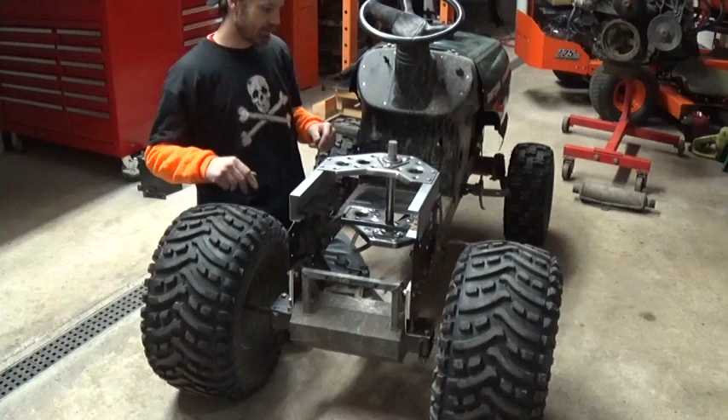This Jackshaft install though will actually have like 3 sections to it. The last video we wrapped up basically section 1, which is the Jackshaft itself. It is installed, she spins, she twirls, she does what she needs to do. I'm now going to move to section 2, which is a transaxle.

I want to get the transaxle input shaft extended up. I want to have it mounted at the same height as this top plate on the Jackshaft part. Once that's done, part 3 will be connecting A to B with sprockets and chain. So let's get started. It's going to be just like this piece over here, different shape, different bearing, but same principles and all that fun hoo-ha stuff.

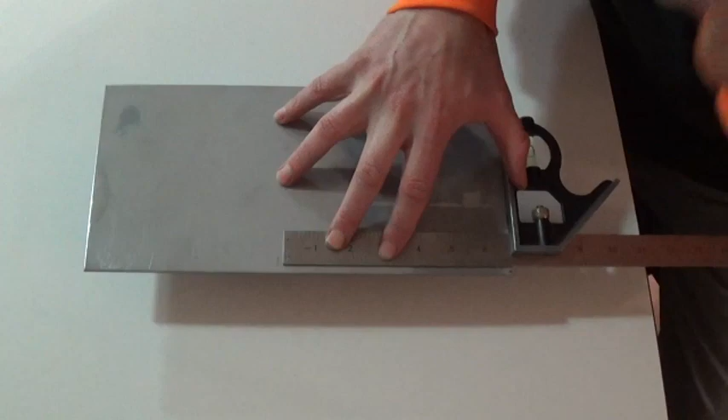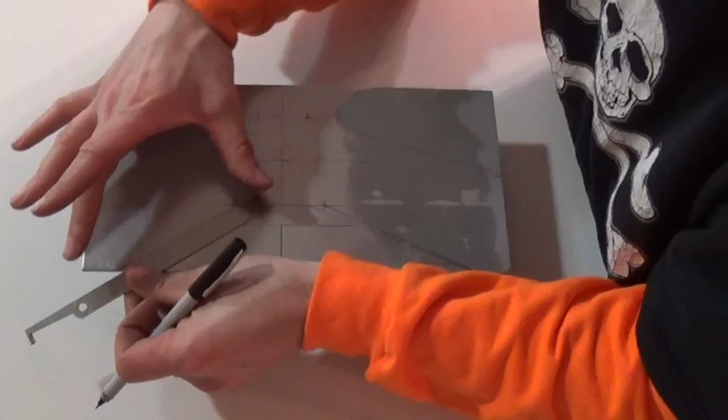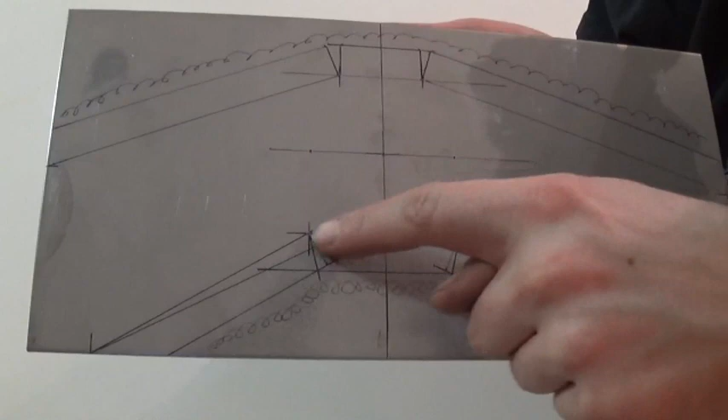And there she is in the flat. It's just like the other bearing plates I made in one of the previous videos. I'm going to go ahead and cut on the outside line here to remove all the excess metal, and then do the relief cuts inwards at the 4 points. Then the inside line here, I'm going to go ahead and throw a 5/8 bend top and bottom to add some rigidity to the plate.

I got the position for the flange bearing. Then I'm going to go ahead and sink some dimple dies in this plate as well, just to lighten it up, because it is 11 gauge just like the other ones.

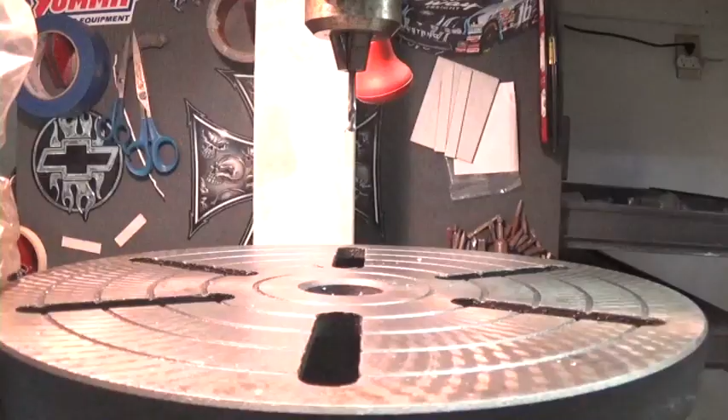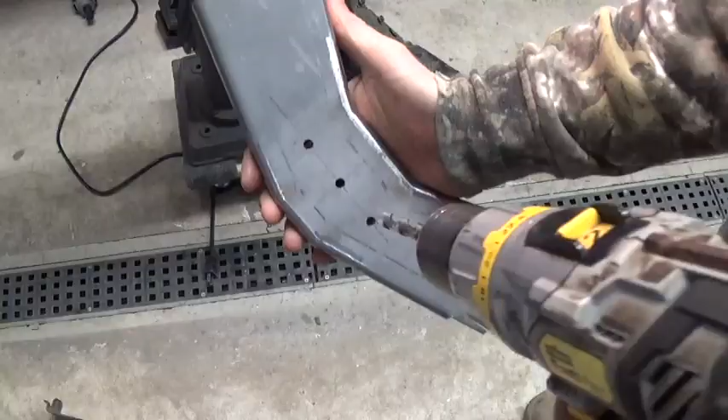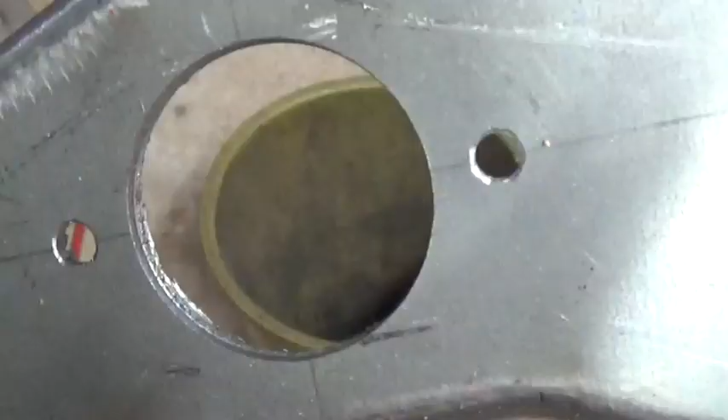Oh. Bingo! Gnarly, man. Much better.

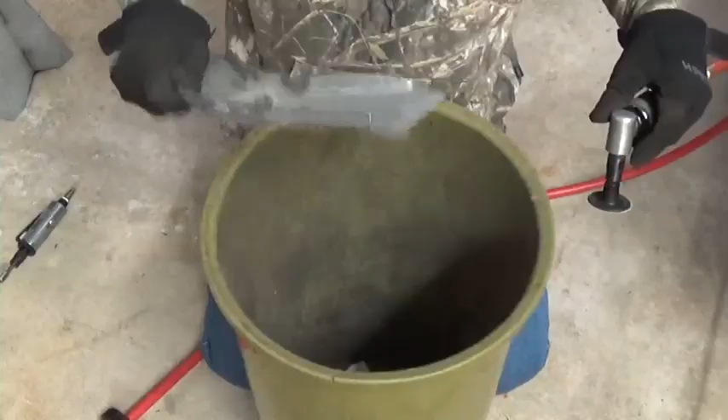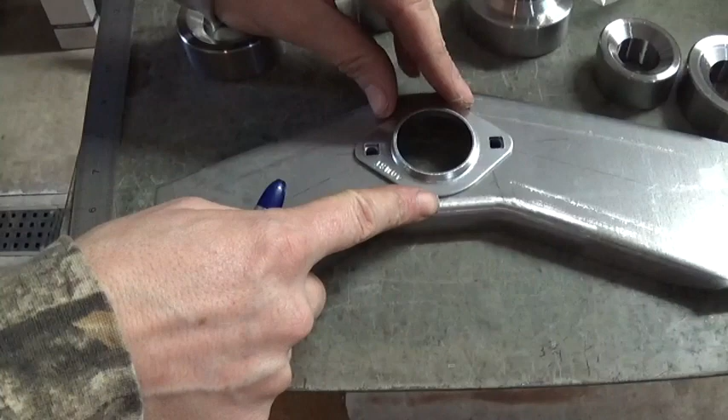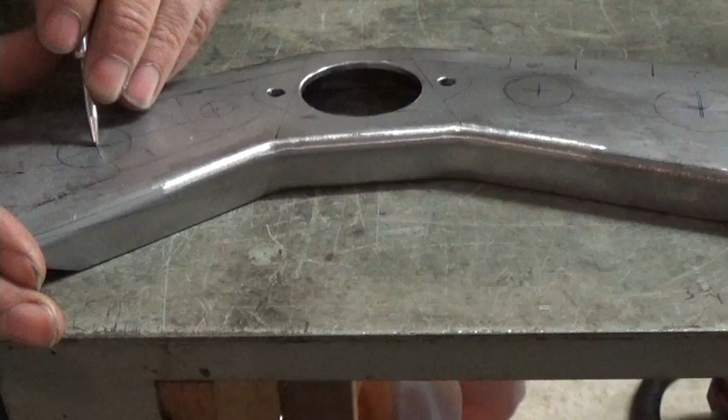Alright, I tried laying some layout lines on this one again. Figured it might be a tad bit more symmetrical, but it's not. So, I'm gonna wing it as well as the last two that I made. Inch and a quarter. Coming up next.

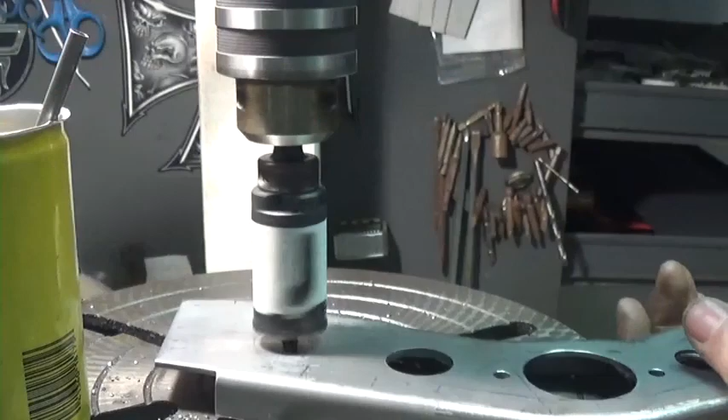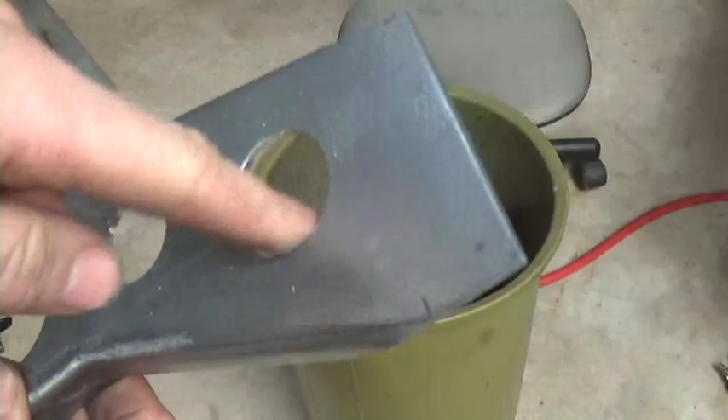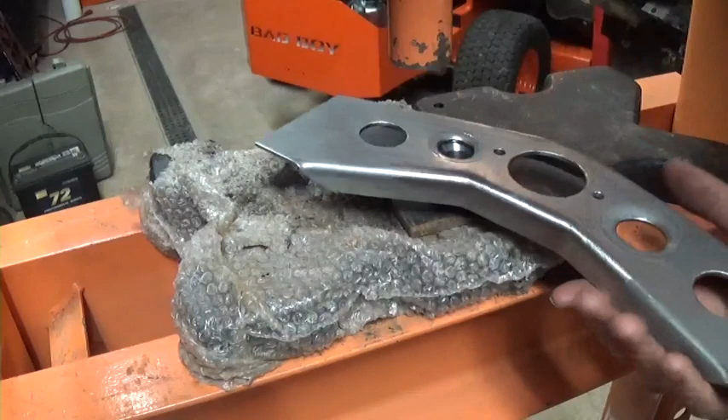Yeah. Oh yeah, not getting cut on those things now. Let's dimple die some holes. Some driblets of oil on there. Uh-oh. One more to go.

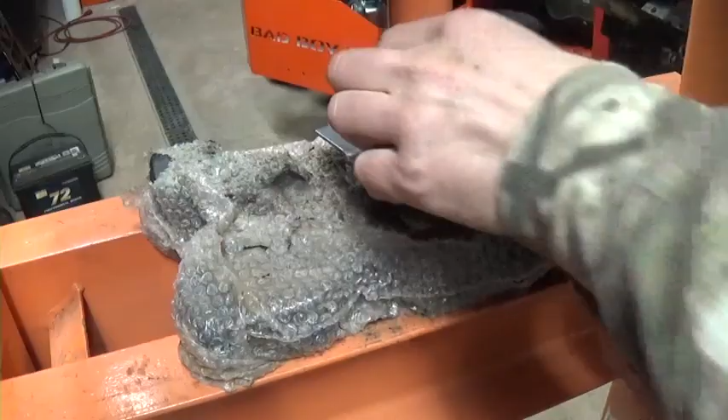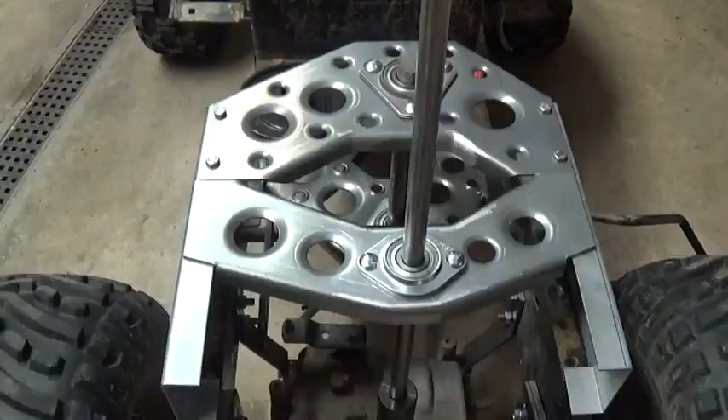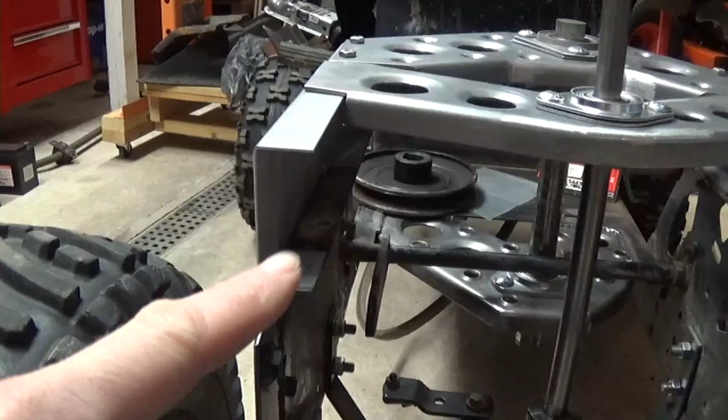So here is the rear bearing plate for the transaxle basically installed. The only thing I have not done is drill the holes and bolt it down in place. I'm going to wait to do that till I have the muffler situation figured out. And that is because the muffler basically sits over the frame rail here. So when I put this riser in, it's in the way of the muffler. So I got to figure out what I'm doing there.

Once I have that figured out, I'll go ahead, drill the holes, bolt the bearing plate into position, and cut the shaft down to size. The only thing I do not like about the looks of this is the gap difference. How I have like an inch overhang here, but I have like 2.5 here.

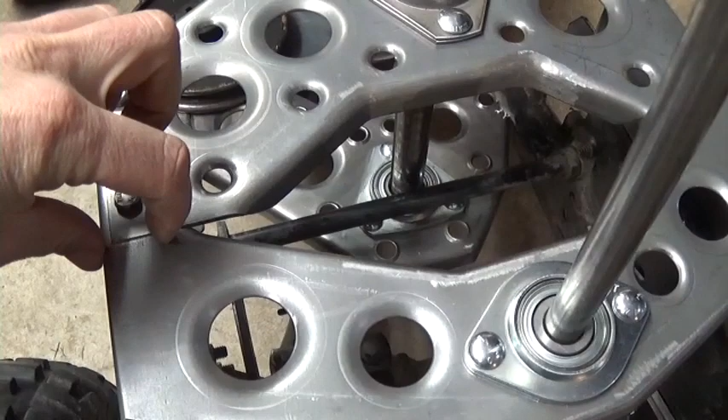I really wish I made this one an inch as well, so each edge would line up and look the same. But this bearing plate up here was a complete disaster anyway, so I may end up making a new one for it down the road. But I'm just gonna run with it how it is for now.

Next video, I'm going to have shaft A connected to shaft B with sprockets. I'm going to have the pulley put on the bottom of shaft A, have the belt put on, and I should have everything connected back here. It really should be done for the next video, but we'll see. And get the muffler on.